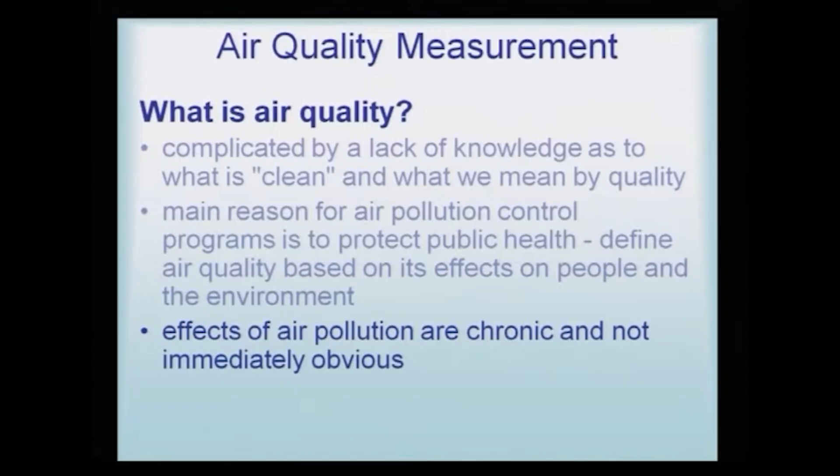The main reason for an air pollution control program is to protect the public and define the air quality based on its effect on people and the environment. So, it is very simple why we need air pollution control. Mainly it is for the health of the people, and to protect public health, air quality should be very good. The effects of air pollution are very chronic and they do not show an immediate and obvious effect. It is a slow pollutant and it does make a lot of difference by inhalation over a long period of time, and that is the effectivity of air pollutants.

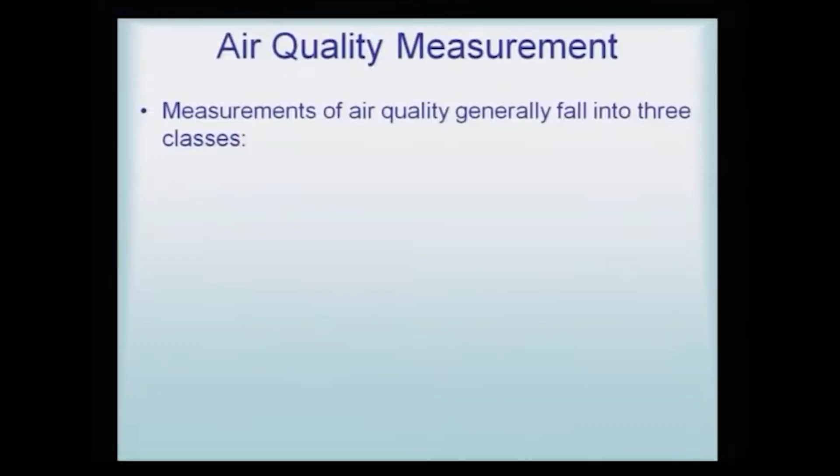Measurements of air quality generally fall into three classes. Measurement of emissions is called source sampling, when a particular emission source is measured, generally an on-the-spot test. Second is the meteorological measurement, measurements of meteorological factors that show how pollutants are transferred from source to recipient.

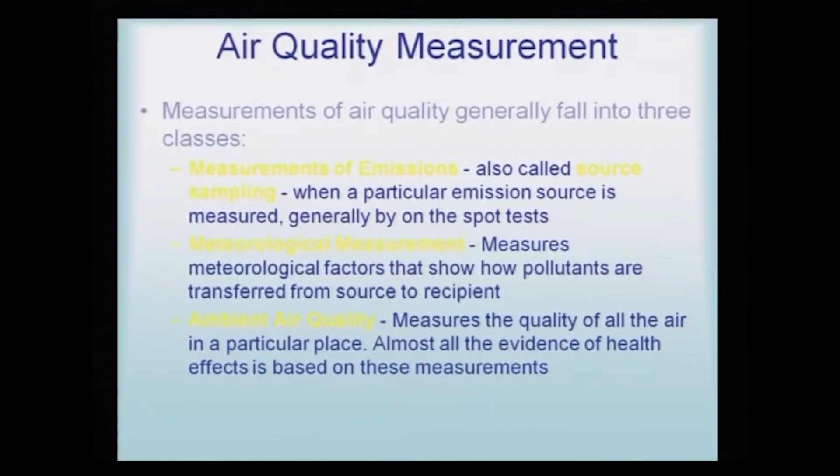And the third is the ambient air quality, the quality that I was mentioning, that in every place in the centers of big cities, there are these air quality values displayed for the public to see whether the air quality is good or bad. It measures the quality of all the air in a particular place. Almost all the evidence of health effects is based on these measurements. So, if we say that a place has good ambient air quality, we understand that there is nothing harmful if a large number of people are inhaling this particular air.

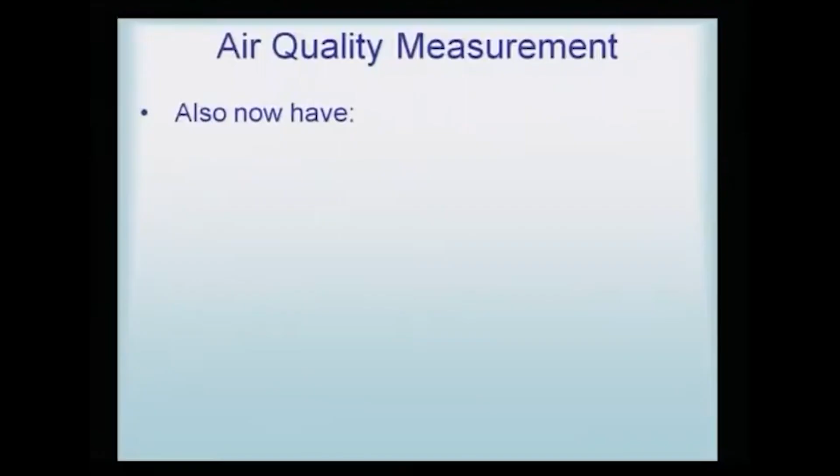Air measurement also now includes industrial hygiene sampling for testing the air quality inside factories and places of work. You must have seen that some factories have a very dirty and very smoky atmosphere. Now, how good or bad it is for their workers is of utmost importance, because the workers are working there for 8 hours, and 8 hours of continuous inhalation of these pollutants can definitely cause a serious health problem.

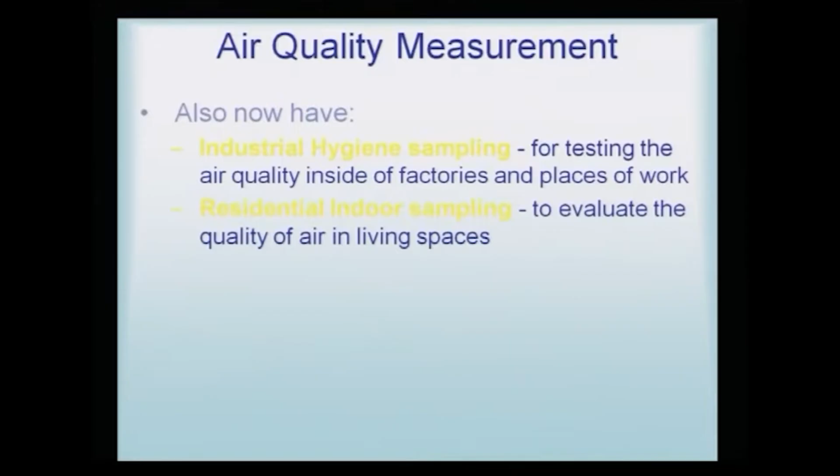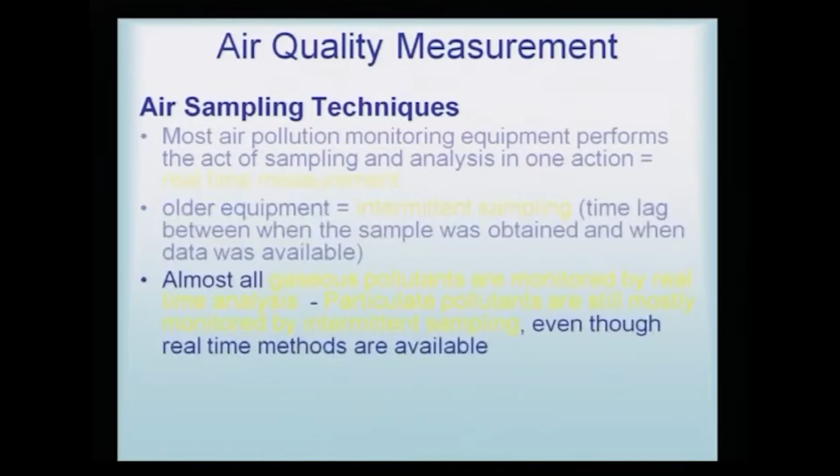Air quality therefore needs to be measured. So, there have to be air sampling techniques. Most air pollution monitoring equipment performs sampling and analysis in one action. That means it is a real time measurement; it will trap the sample as well as analyze it at the same time. Older equipment, however, had intermittent sampling. That means the samples were first collected, there was a time lag, and then they were taken to the laboratory where they were analyzed. So, there was a time lag between the sampling and when the data was available after the analysis. However, almost all gaseous pollutants are monitored by real time analysis.

Particulate pollutants are still mostly monitored by intermittent sampling. So, by and large, the carbon monoxide, the NOx, the SOx and the ozone are all analyzed by real time analysis. That means, on the spot it is collected and on the spot it is analyzed. However, the particulate matter needs to be analyzed by an intermittent method, even though real time methods are also available.

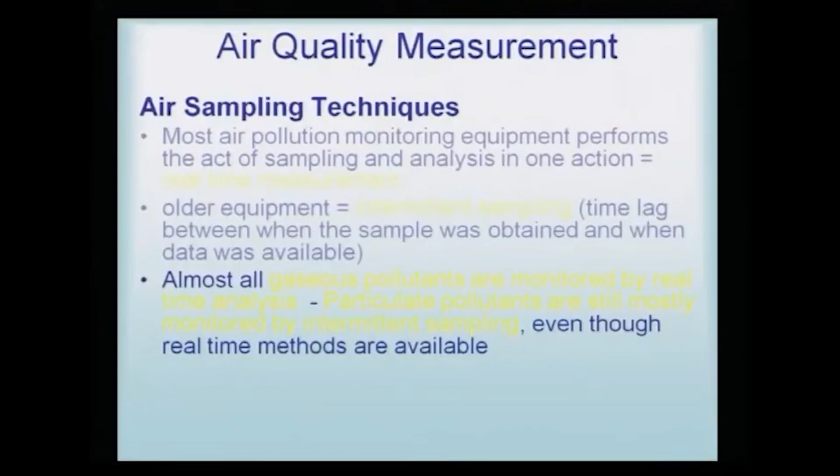So, air sampling technique, therefore, how does it go about? When obtaining a sample for air pollution analysis, one should keep in mind that there should be sufficient sample for analysis. It is not that you just take one very small pinch of air and you think that you can analyze. That is not enough. Most pollutants, at very low levels, require a large volume of gas for accurate measurements. So, large canisters are designed so that a good volume of air can be trapped, and therefore, the analysis can be carried out properly.

Pollutants in very small quantities are easy to contaminate. Take care to purge sampling containers if grab samples are used. So, it is important that the transfer from the canister to the analytical machine must not be further contaminated. If there are small contaminants, they should be properly transferred from the canister, that is the sampling device, to the analytical device.

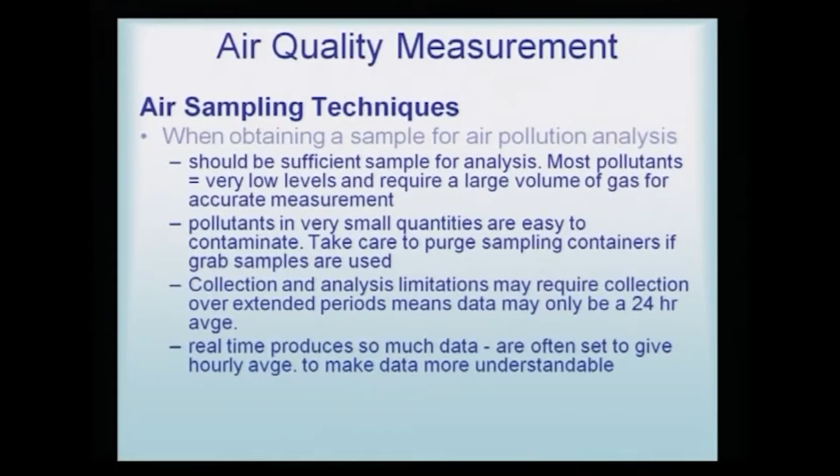Collection and analysis limitation may require collection over an extended period. Means data may only be a 24-hour average. What does this mean? That means, between the collection time and the analytical time, sometimes it may take 24 hours for the entire process to get covered. Real time produces so much data it is often set to give hourly averages to make data more understandable, but real time or on the spot analyses are much faster, and almost in 1 hour they will generate the results and the data.

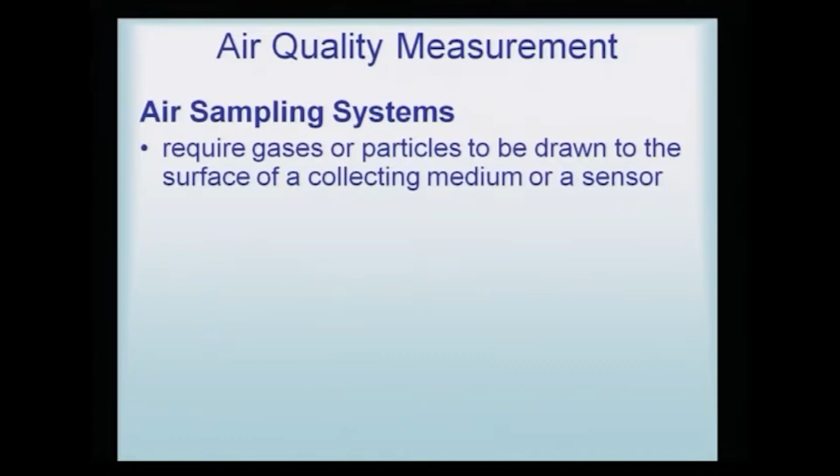Air sampling requires gases or particles to be drawn to the surface of a collecting medium or a sensor. Obviously, because it is a gaseous sample, the particles or the gases must be collected onto the surface of the medium. Sampling trains may include a vacuum pump, a vacuum trap, a flow regulator and a collecting device or sensing unit. So, these are the different types of traps for collecting the gases, and along with the air it brings in the air pollutants also. Sampling trains for gases may also utilize filters to prevent particles from entering the collecting unit. So, it also uses some kind of filtration device, so that once trapped it will remain trapped.

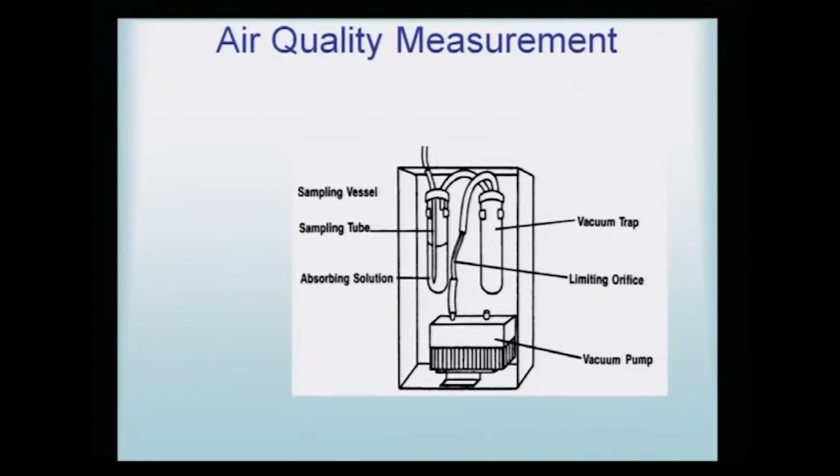So, as I told you, from sample to sample, the sampling procedure and the analytical procedure have to be different, so that it actually suffices the need of that particular type of sample. And here we are talking about air quality measurements. So, we have air quality measurement devices. So, there is an impinger, and that is the normal procedure of using an air quality measuring device.

Air sampling procedures are conducted by static, grab, intermittent or continuous processes. So, air sampling can be done by any of these 4 methods. It could be a static method, it could be a grab method, it could be intermittent, that means after a time gap some gas is collected, after another time gap another sample is collected, or it can be a continuous trapping device.

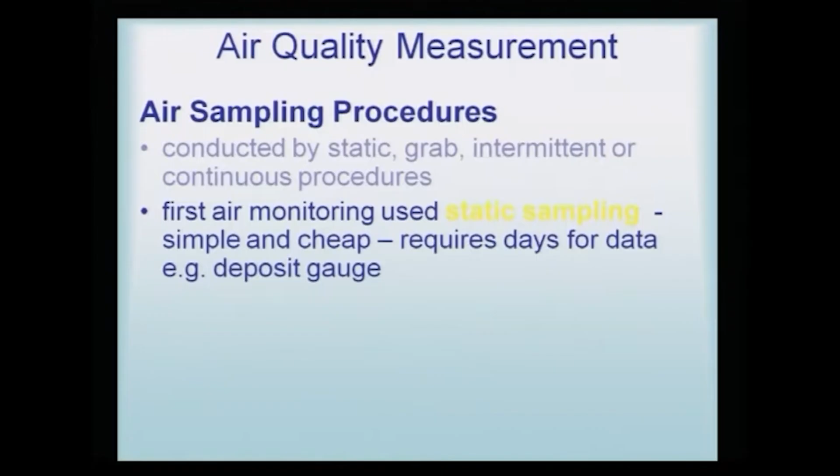Static sampling was the first air monitoring used: simple and cheap, requires days for data, deposit gauge. So, that is a long drawn process, because it is a slow process. Static sampling was one of the first air monitoring sampling procedures, and it was not a very foolproof method. Grab sampling, not commonly used to monitor ambient air quality, uses bladders or syringes. So, they were just collecting some sample in a bladder or syringe and then trying to analyze.

Site selection: general requirements for site selection. How do we choose where to collect the air sample? I told you that busy places where the vehicular population is very high, or factory areas where carbon monoxide, NOx and SOx are likely to be very high, are certain generalized areas for site selection. Purpose of monitoring, number and type of instruments that may be required, duration of measurements. The best available general guide comes from AS2922.

That means there are some very standard air quality measurement protocols, and one of them is AS2922, which needs to be followed in order to have a guideline for general site selection. Why it should be monitored, how many times it should be monitored, and what kind of instrument should be used are all given there.

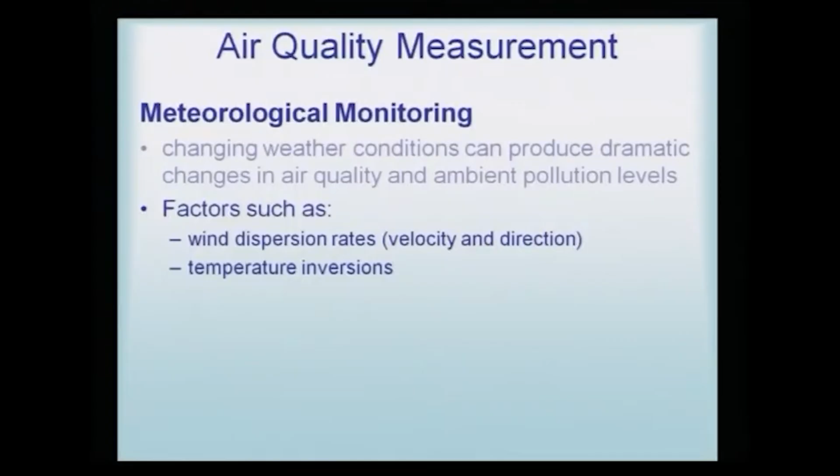Temperature inversions: I just gave you an example of how in cold weather the smog is quite near the earth's surface, whereas in summer weather the smog rises up. So, that is affected by the temperature inversion. Photochemical reactions: there are a lot of free radicals that are generated because of these particulate matters and the sunlight and so on. Rains also can make a lot of difference to this monitoring.

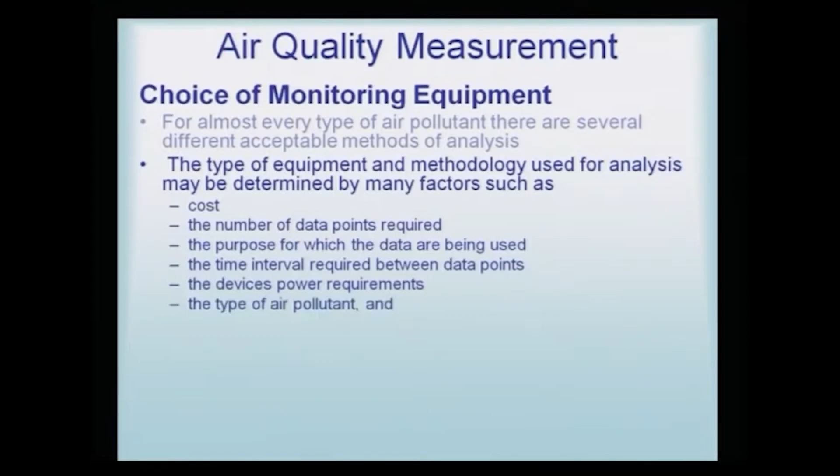Choice of monitoring equipment: for almost every type of air pollutant there are several different acceptable methods of analysis. The type of equipment and methodology used for analysis may be determined by many factors such as cost, the number of data points required, the purpose for which the data are being used, the time interval required between data points, the device's power requirement, the type of air pollutant and the environment in which the monitoring equipment is being placed.

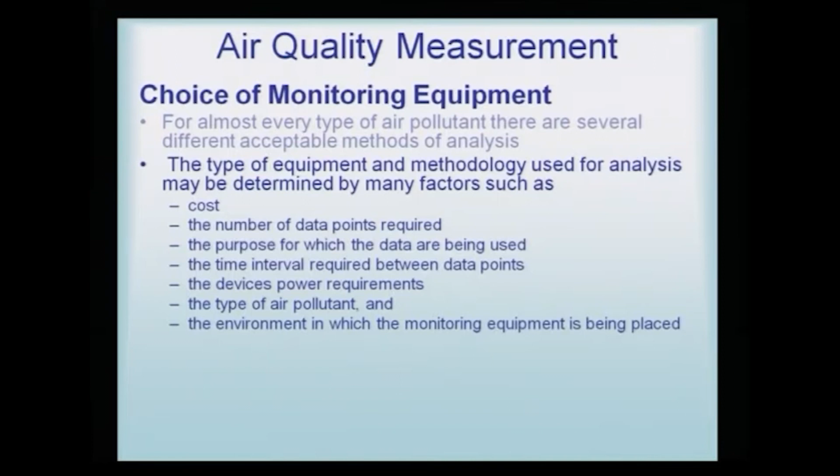So, when we are using an air quality measurement device and making a choice between A, B, C, D, what are the factors that must be kept in mind? Firstly, the machine should be cheap, so there is a factor of cost. The number of data points: if the analytical machine gives too large or too few a number, the data cannot be interpreted in the proper manner. The purpose for which the data are being used, and what we have to analyze on the particular machine, should be very clear.

The time interval required between the data points: I told you that real time gives hourly data, whereas intermittent sampling takes as long as 24 hours. So, we have to make that choice, whether we are looking at a very polluted site or a reasonably polluted site, and that would be the limiting or deciding factor for which device to use.

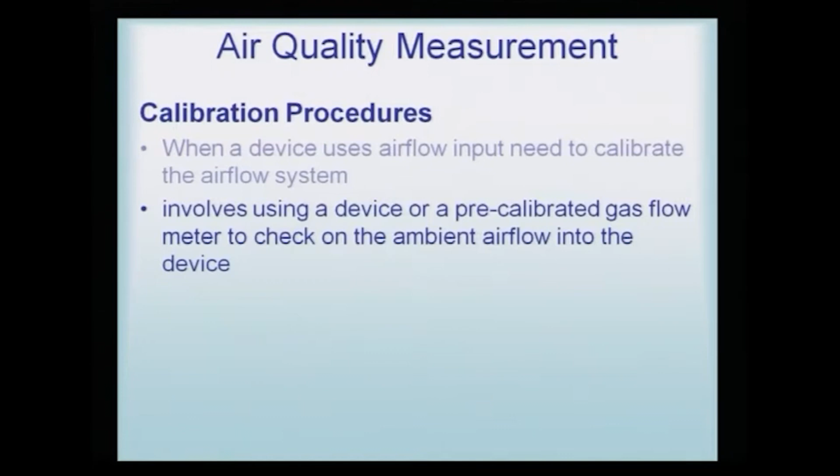Calibration procedures: any methodology which is based on comparison is actually based on calibration. When a device uses airflow input, we need to calibrate the airflow system. Obviously, if we do not have something to compare, how would we say that the air quality is good or bad? So, to discriminate the good and the bad, there has to be a comparative or calibration procedure. It involves using a pre-calibrated gas flow meter to check the ambient airflow into the device, to check whether the gas is properly coming into the collecting device.

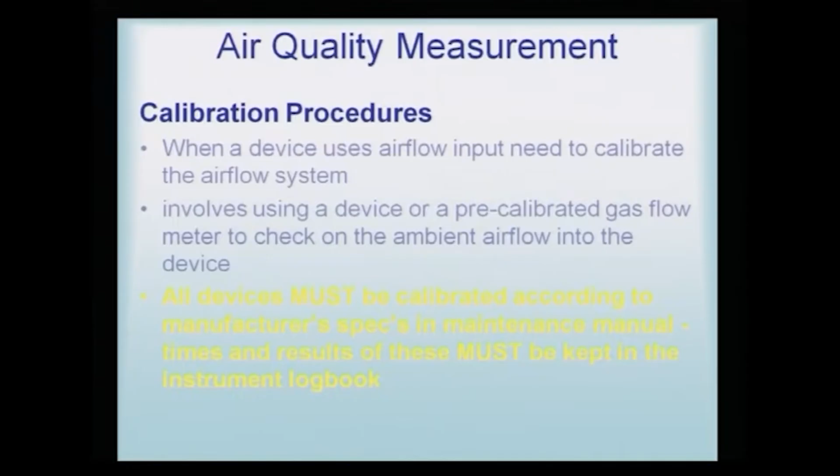All devices must be calibrated according to the manufacturer's specification in the maintenance manual. Times and results of these must be kept in the instrument logbook. It is important to have an instrument logbook to see when the machine was validated and whether it is working in proper condition, because any machine can go wrong, and these records must be kept up to date with all the regular checks, so that the machine can be taken to be working in a normal and precise manner.

In the calibration process, two more important things have to be told. Two types of calibration procedures mainly used on air monitoring equipment are the static methods and the dynamic methods. The static method involves a simple one-point electrical or chemical test, as the name suggests. It's just one air sample, some reagent may be added, and just on the spot it is

kind of tested. The next method is the dynamic method, based on generating a flowing stream of calibration gas, which is used to calibrate the whole instrument, and that is the preferred method for calibration. So, a dynamic method is definitely having an edge over the static method. A static method, we can always say, is more qualitative, but the dynamic method is quantitative in its data.

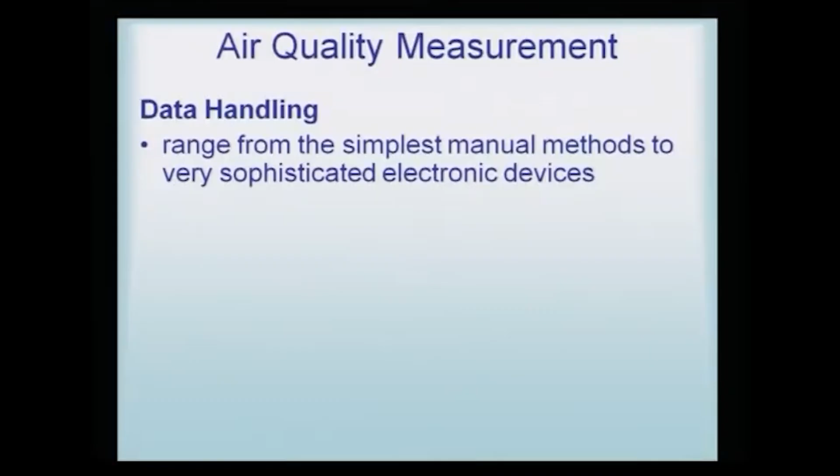Data handling. Once we have the data in hand, how do we make an interpretation? How do we make sense out of the data? It can range from the simplest manual methods to very sophisticated electronic devices. So, the data handling can be a simple manual method, that this is the value, and at this time of the day the value was X, after 6 hours the value was Y, and after 10 hours the value was Z.

That is a very simple method, a manual method, but there are very sophisticated devices which continuously provide the data online. Manual methods use field data sheets or logbooks where all parameters are entered manually, not suitable for remote sites. Now, when there are very remote sites, this is not a very good method for such a situation.

However, data loggers, that is electronic devices that store many data points in an electronic memory, are the latest trend of data handling devices. They can be attached to a device and accumulate the data for long periods of time if required. So, if we want to compare, say, what was the air quality on June 30th, 1990, and then 2010, and then 2020, these kinds of data can be collected because in the computers this can be stored as memory.

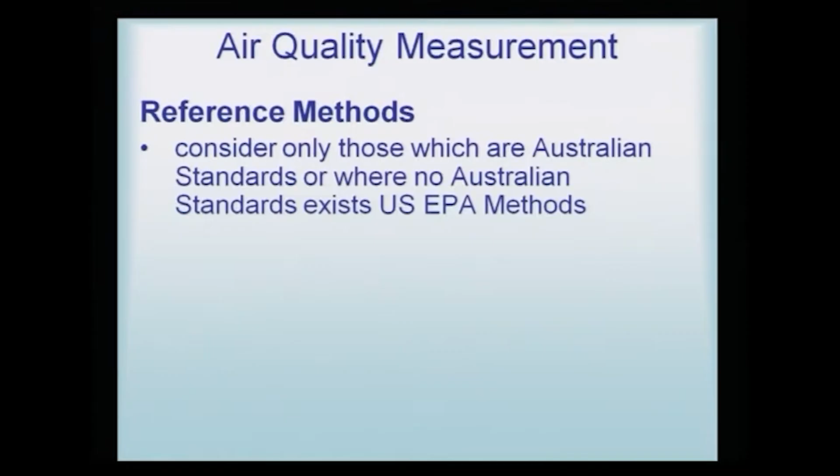Reference method. Consider only those which are Australian standards or, where no Australian standards exist, US EPA methods. It is not necessary that one should only follow the Australian methods. One can follow any country's; for our country we can follow the BIS method, which is again taken from the US EPA method. So, you can understand that the US EPA method is the ultimate standard, and all other countries have taken norms and adjusted them according to their own air quality conditions.

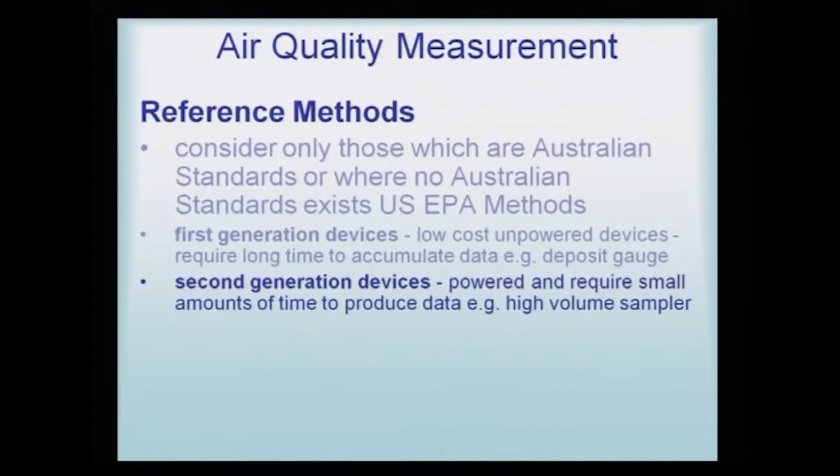First generation devices. What were the first type of air quality measuring devices? Low cost, unpowered devices that require a long time to accumulate data, and therefore they are now almost obsolete. Second generation devices are powered, that means they work on electricity and require a small amount of time to produce data, and therefore a high volume of samples can be analyzed on them. Third generation devices are still more advanced. They produce constant, continuous data.

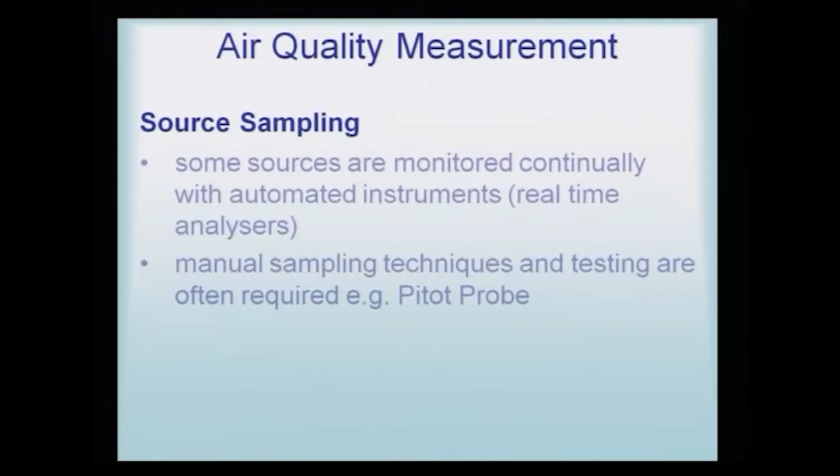Source sampling. Some sources are monitored continuously with automated instruments, that is, real time analyzers. Manual sampling techniques and testing are often required. For that, a pitot probe is used. Source sampling, how does it take place? Introduce a probe into a waste gas stream flowing in a smoke stack. The probe withdraws a sample of waste gas which is analyzed in the laboratory.

So, how does this take place? Introduce a probe into a waste gas stream flowing in a smoke stack. The probe then withdraws the sample from the waste gas. Gaseous pollutants are collected by absorption in impingers, adsorption on charcoal or other media, or condensation in collecting traps.

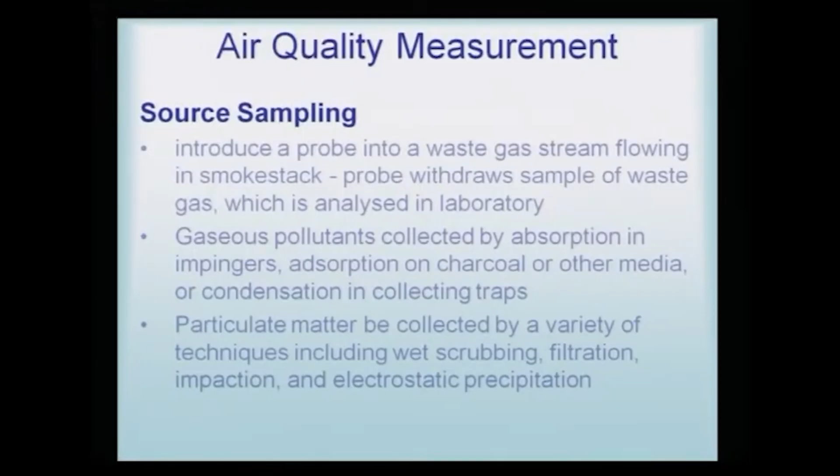So, gaseous pollutants can be simply absorbed in impingers, or adsorption on charcoal can also take place, or they can be made to condense in collecting traps. Particulate matter can be collected by a variety of techniques including wet scrubbers, filtration, impaction and electrostatic precipitation.

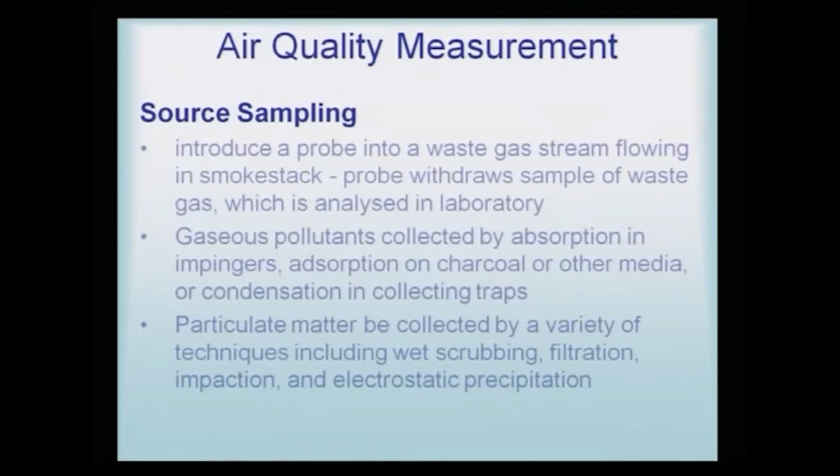So, for the other gaseous pollutants, that is carbon monoxide, carbon dioxide, NOx and SOx, control is mainly by absorption or adsorption or condensation. But for particulate matter, it is wet scrubbing, filtration, impaction or electrostatic precipitation.

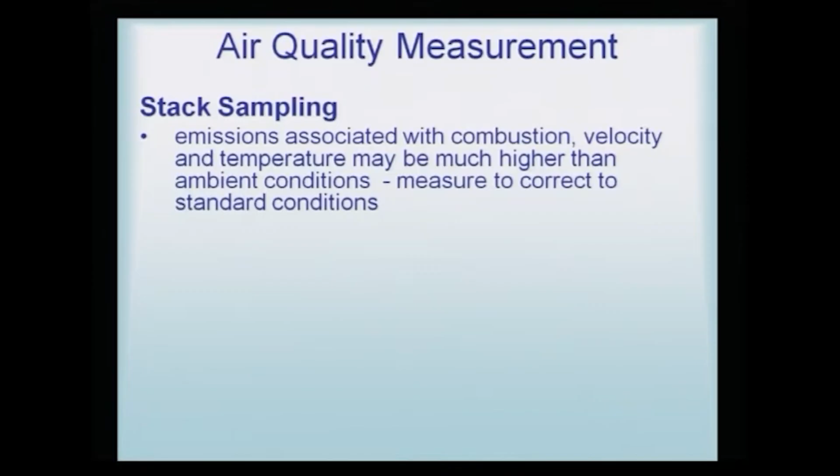Stack sampling: emissions associated with combustion, velocity and temperature may be much higher than ambient conditions, and are measured to correct to the standard conditions. Now, what happens in factories? One needs to put a check on what the emission rates are. Sometimes, if the combustion has not taken place properly in the furnace, it will emit all kinds of bad gases and notorious pollutants, and that needs to be checked.

Velocity data determined from pressure measurements utilizing a pitot tube are necessary to calculate mass loading to the atmosphere, that means plant emission rate. If there are emissions from a steel plant or from the blast furnace, then the flow rate and the velocity data should be determined very perfectly.

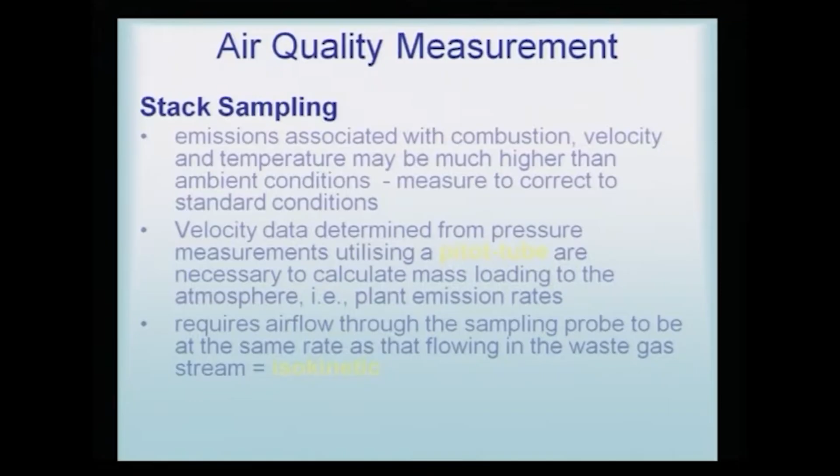It requires airflow through the sampling probe to be the same rate as that flowing in the waste gas stream. So, it should be isokinetic. The airflow in the sampling probe should have the same rate as the waste gas stream. If the speeds are different, then some things could go unanalyzed.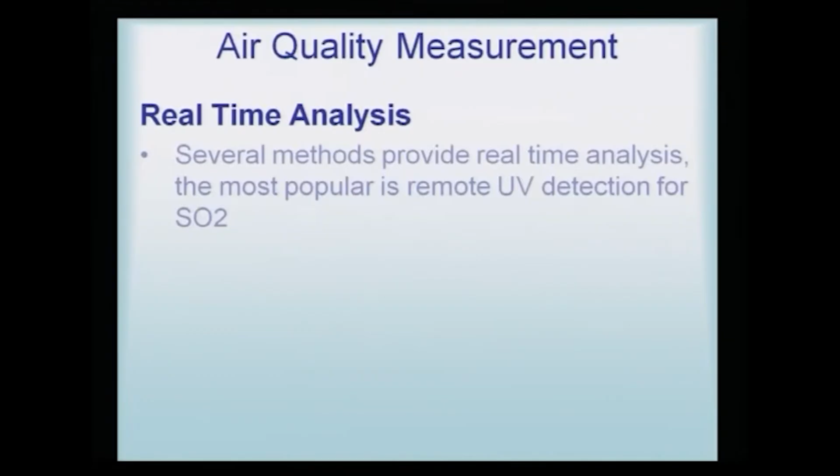Real time analysis. Several methods provide real time analysis. The most popular is remote UV detection for sulfur dioxide. As I have been telling you time and again, every pollutant, every chemical needs to be treated as a special identity, and the methods of determination are very typical and specific.

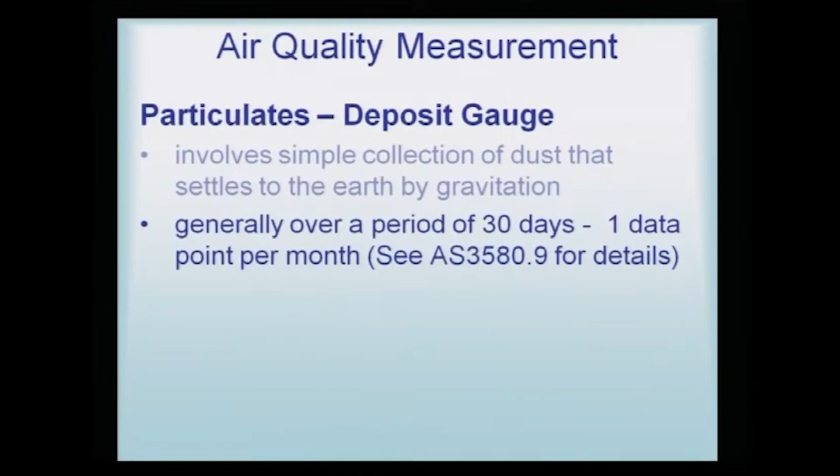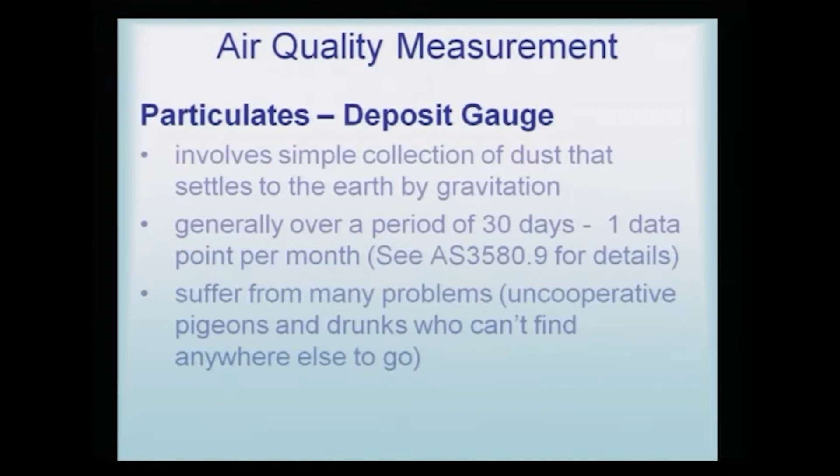Particulates are actually measured on a deposit gauge. It involves simple collection of dust that settles on earth by gravitation, generally over a period of 30 days, one data point per month. If you refer to AS 3580.9, more details can be obtained. It suffers from many problems: uncooperative pigeons and drunks who cannot find anywhere else to go. So, there are many problems that can arise with this kind of particulate deposit gauge.

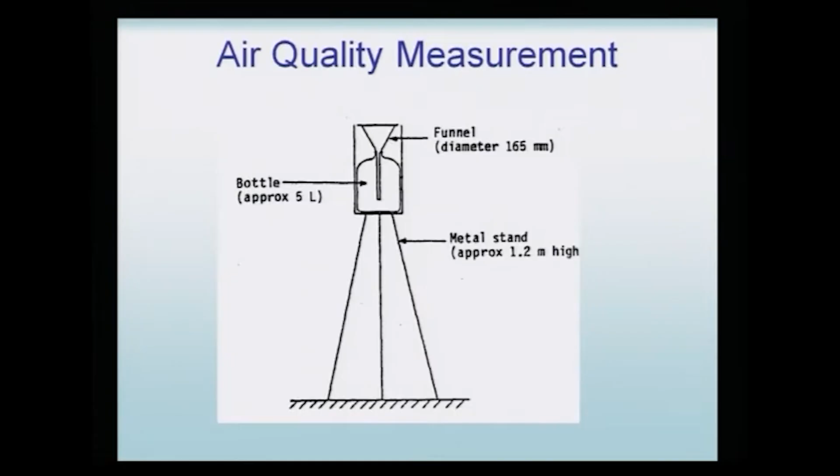Now, this is how it looks. There is a bottle, a funnel and a metal stand. The particulates are trapped in the bottle, and there is a gauge at the point of entry.

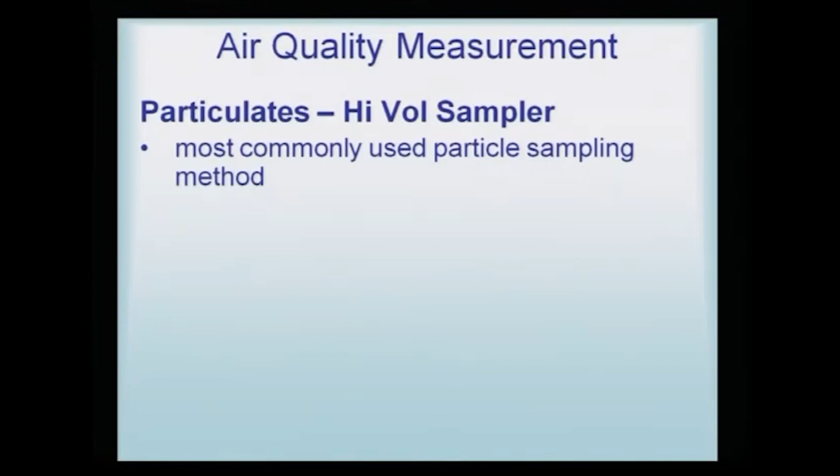Particulates high volume sampler. This is called a particulate high volume sampler, the most commonly used particle sampling method, because it is now most prevalent for the collection of particulate matter. PM 2.5 and PM 10 are collected by high volume samplers. Analysis is gravimetric, using a filter.

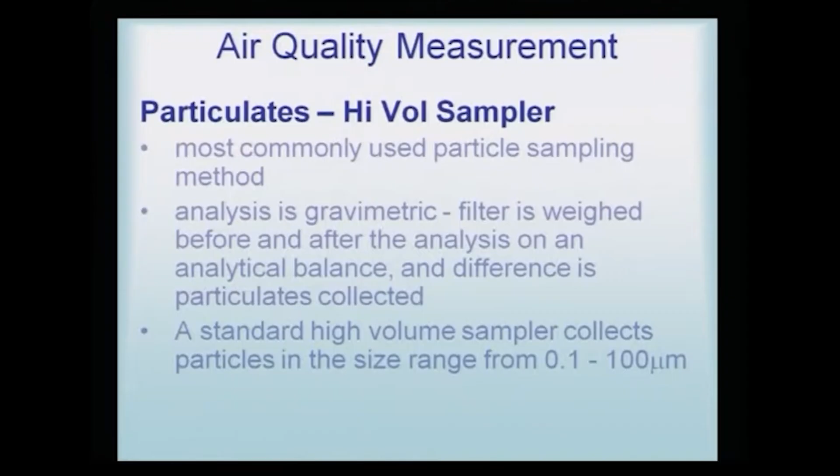The filter is weighed before and after on an analytical balance, and the difference gives the particulates settled on the filter paper. So, it is a very simple method, but the microbalance should be accurate to 4 decimal places. Only then can even trace or microgram quantities be analyzed. A standard high volume sampler collects particles in the size range of 0.1 to 100 micrometers.

In particulate high volume samplers, airflow is measured by a small flow meter calibrated in cubic meters of air per minute. The particulate concentration measured is referred to as total suspended particles, TSP, a combination of settleable particles and suspended particles. So, it is the total of what settles and what is suspended. It is expressed in micrograms per cubic meter for a 24-hour period, normally as part of a 6-day cycle.

So, every day after 24 hours the particulate matter is analyzed. That is what it means, and it only goes from Monday to Saturday. Sunday is a holiday for such analysis.

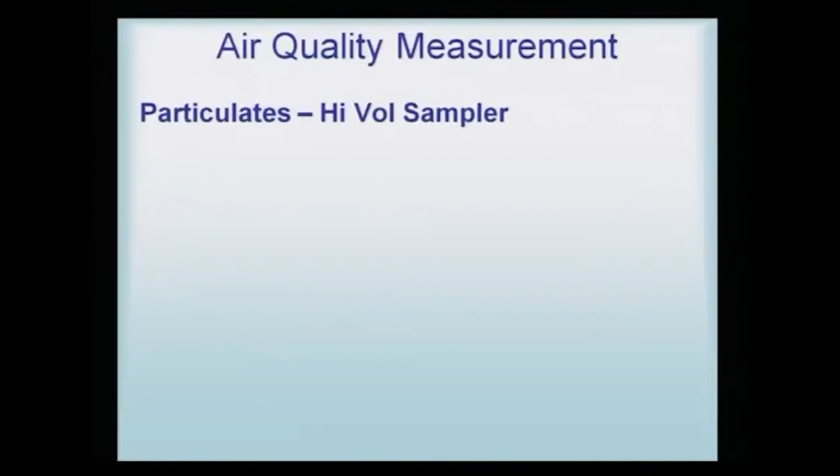Particulate high volume sampler. More information and correct operating conditions can be learned from another standard, Australian Standard AS 3580.10, released in 1990. Here the PM 10 and PM 2.5 high volume samplers only collect particles with aerodynamic sizes of 10 micron or less, or 2.5 micron or less.

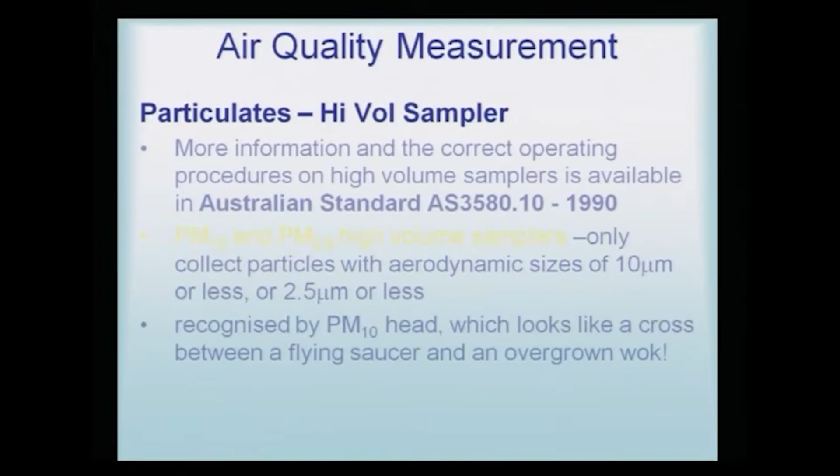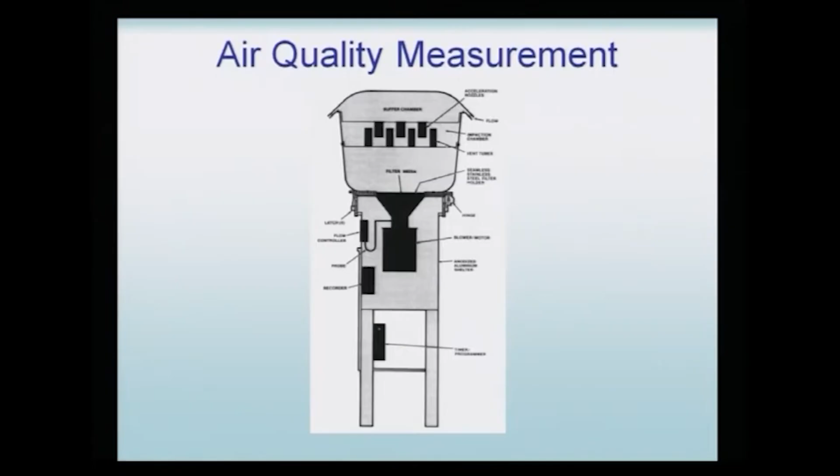It is recognized by the PM 10 head, which looks like a cross between a flying saucer and an overgrown wok. So, this is what it looks like. It is a somewhat complicated device, but it has all the ingredients to collect, and at the same time there is a fitted balance which measures the increase in weight due to the deposition of this particulate matter.

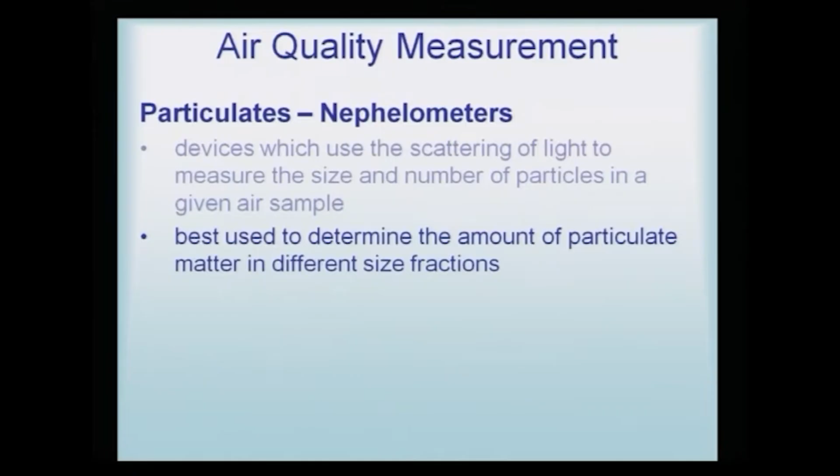Particulates can also be measured by nephelometers, devices which use the scattering of light to measure the size and number of particles in a given air sample. Best used to determine the amount of particulate matter in different size fractions. So, they have the capability, based on using scattering of light, to measure the different sizes and the numbers of particles in the air sample.

Also, they can determine the amount of particulate matter of different sizes by fractionation, and it is usually used to examine the amount of particulate material in the 0.1 to 2.5 micrometer size range, which represents the greatest risk to human health.

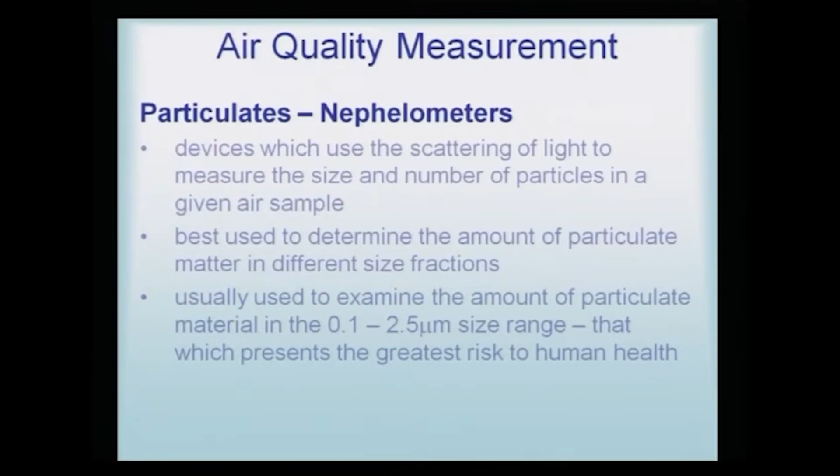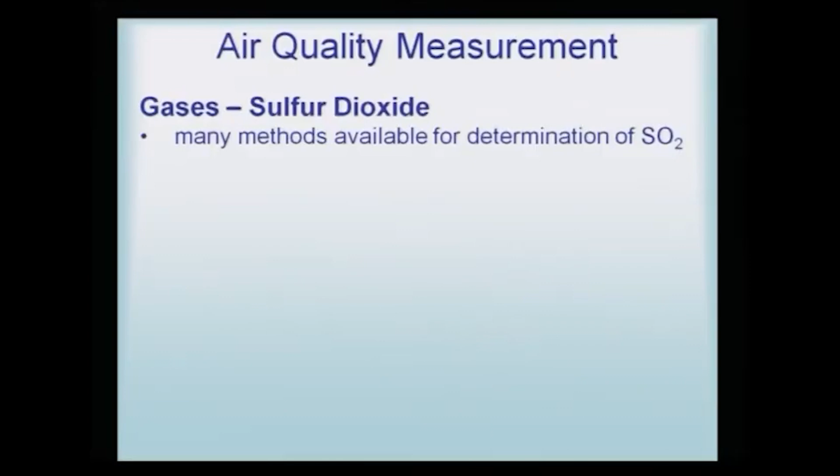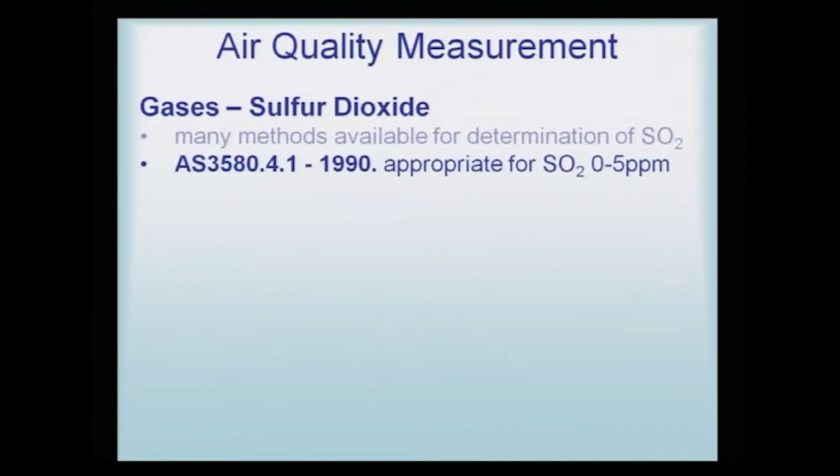Then comes the gaseous sampling and analysis of various other pollutants, the first one being sulfur dioxide. Many methods are available for determination of sulfur dioxide. One method is AS 3580.4.1, released in 1990, which is most appropriate for sulfur dioxide analyzed in the range of 0 to 5 parts per million, or ppm, and permits the use of any of the following detection methods.

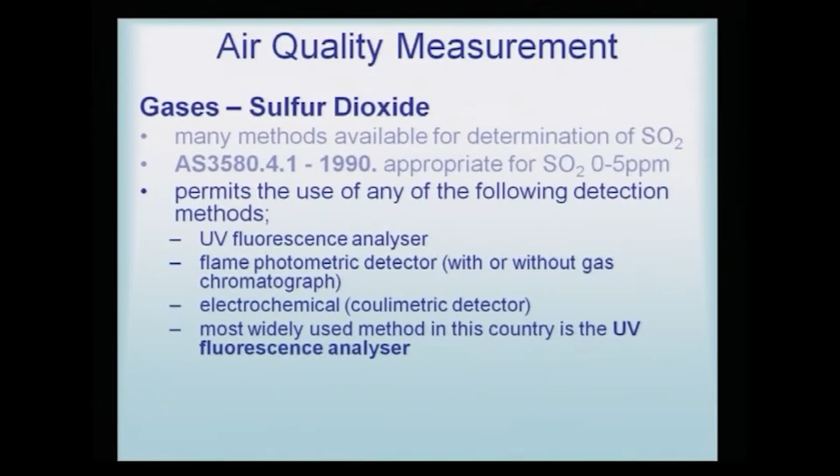That means one can detect it by UV fluorescence analyzer, flame photometric detector with or without gas chromatograph, electrochemical or coulometric detector. The most widely used method in this country is the UV fluorescence analyzer. Because of the ease of usability, the UV fluorescence analyzer is ideally suited for sulfur dioxide contaminants to be analyzed.

Now, of these various methods, I would give a little bit of detailing for the UV fluorescence. The air sample is drawn into a scrubber chamber for the removal of polyaromatic hydrocarbons and then on into an irradiation chamber where it is exposed to UV light. There the sulfur dioxide gets excited and it is analyzed.

Sulfur dioxide particularly has a UV absorption between 190 to 230 nanometers, and the UV fluorescence machine actually ranges from 190, so it is well suited for the analysis. The amount of fluorescent radiation is directly proportional to the concentration of the sulfur dioxide, because only that much will be absorbed as there are sulfur dioxide moieties present.

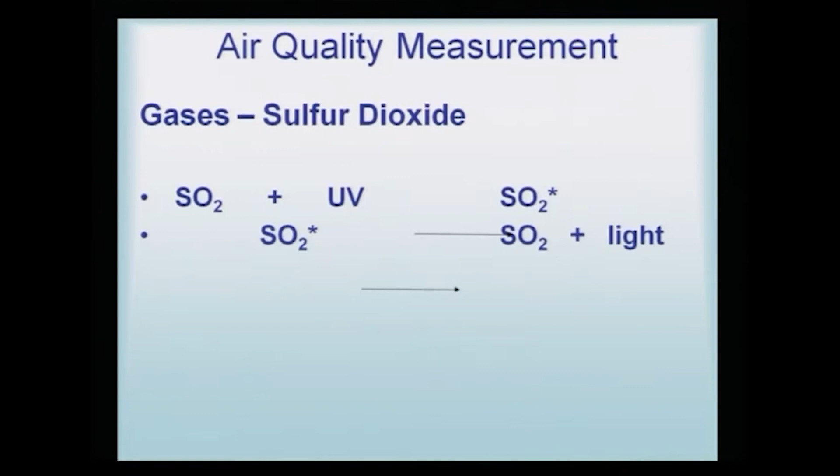As I said earlier about UV radiation and absorption, the concentration is always proportional to the absorption unless there is some other kind of chemical reactivity taking place. So, when sulfur dioxide reacts with UV light, it produces SO2*, and this SO2* then emits light and becomes SO2. This is the procedure that takes place.

Then oxides of nitrogen. I have been referring to this as NOx, but it should be kept clearly in mind that there is more than one type of nitrogen oxide, and it is determined using chemiluminescence specific for NO, that is nitric oxide. But total oxides of nitrogen are determined by passing the sample over a catalyst to convert NO2 to NO.

So, it is only analyzing one particular species, NO, and all the nitrogen dioxide is first converted into NO and then analyzed. It is suitable for ambient air containing NOx, that is both NO and NO2, at levels less than 1 milliliter per cubic meter.

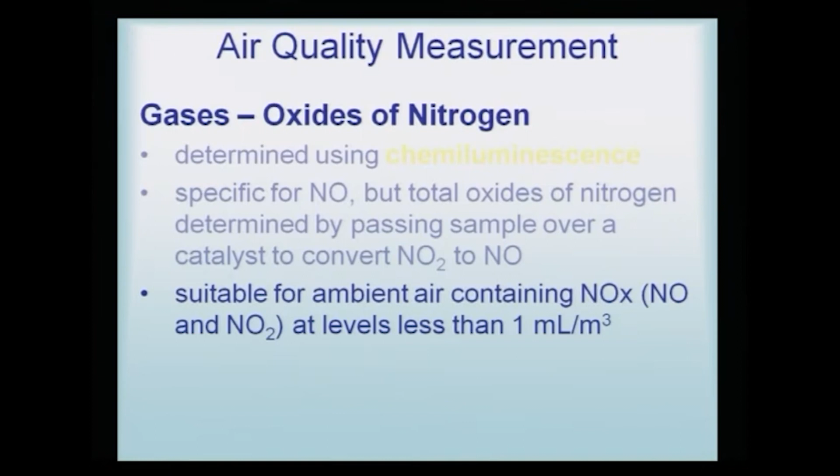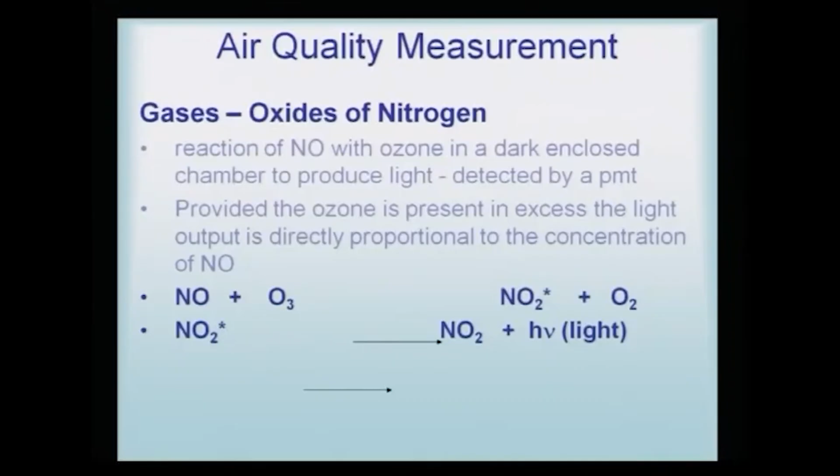For gaseous samples of nitrogen, NO reacts with ozone in a dark closed chamber to produce light, and that is detected by a PMT. Provided the ozone is present in excess, the light output is directly proportional to the concentration of the NO. NO and ozone react and NO2* is generated, which then emits light. So, this is how the NOx are analyzed.

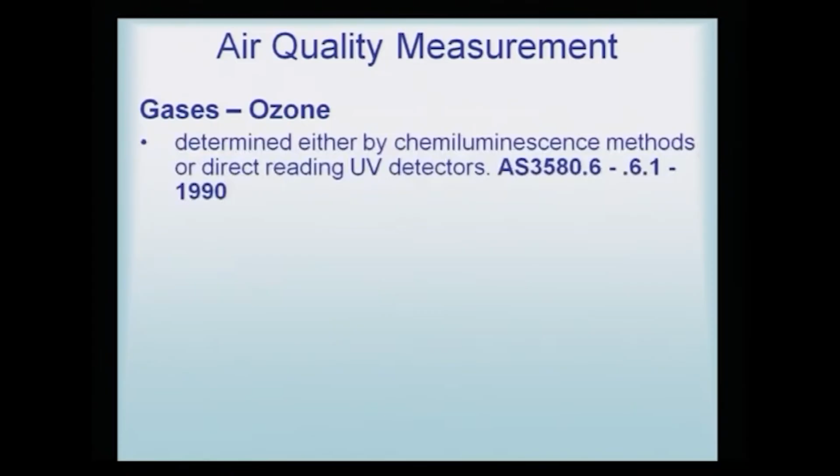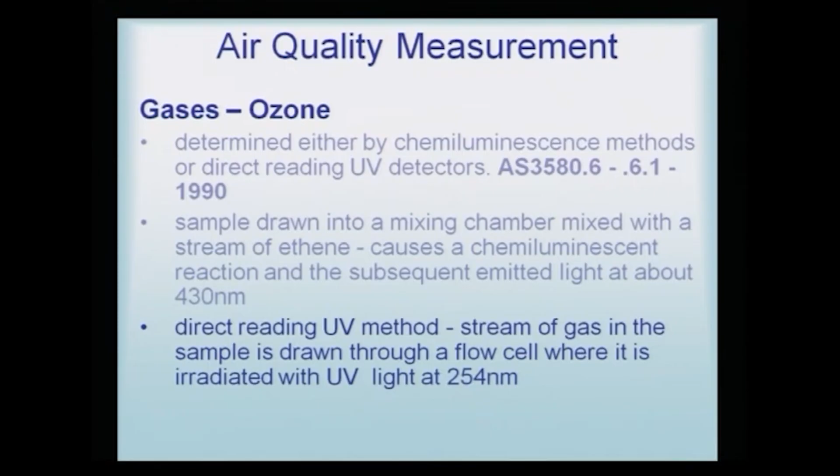Ozone is determined either by chemiluminescence method or direct reading by UV detector. The sample is drawn into a mixing chamber and mixed with a stream of ethylene, causing a chemiluminescent reaction with emitted light at about 430 nanometers. In the direct reading UV method, a stream of sample gas is drawn through a flow cell where it is irradiated with UV light at 254 nanometers. It is a very simple UV method, and a foolproof method of analyzing ozone.